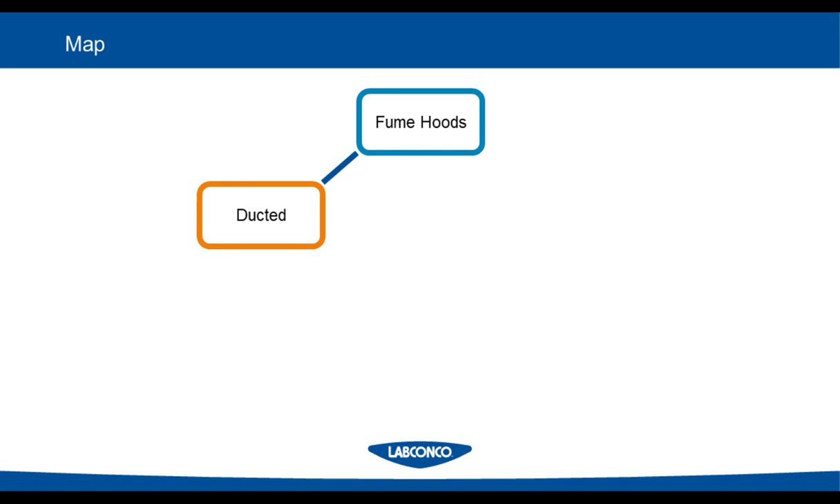Now, ducted fume hoods can come in one of two configurations: the remote blower or the built-in blower models. The first configuration we're going to talk about is the remote blower configuration. This is the most common type of installation. This puts the blower on the roof or somewhere outside of the building, away from the fume hood in a remote location, hence the name of the configuration.

This also allows it to be a little bit quieter than typical because, as I've said, it's far away from the hood. Another aspect to the remote blower is that it can be sized for duct length. This includes the total length of the duct, the 90-degree bends, or any other differences in your mechanical system. The benefit here is that no matter what you have, this can be properly sized for a blower that's going to work for your individual fume hood setup.

They are also very safe. Remote blower puts the entire duct run under negative pressure, and that means that if there are any leaks or seams in the duct run, all the air on the outside of the duct is just going to be sucked into the duct and then exhausted through the building. So you're not at risk of any contaminants getting into a lab space with a remote blower having a duct system under negative pressure.

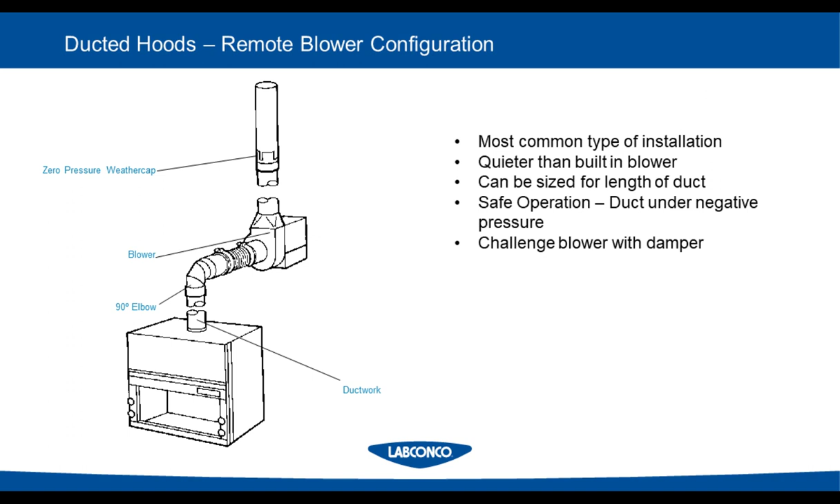This is a typical setup of a remote blower. You can see the zero pressure weather cap that's on the top. That does two things. It allows you to reach important height requirements of discharge for building codes, as well as prevents moisture or precipitation from getting into the blower and causing problems in that sense. So that's just what they typically look like. I wanted to make sure I showed that picture because it's pretty beneficial to see this setup.

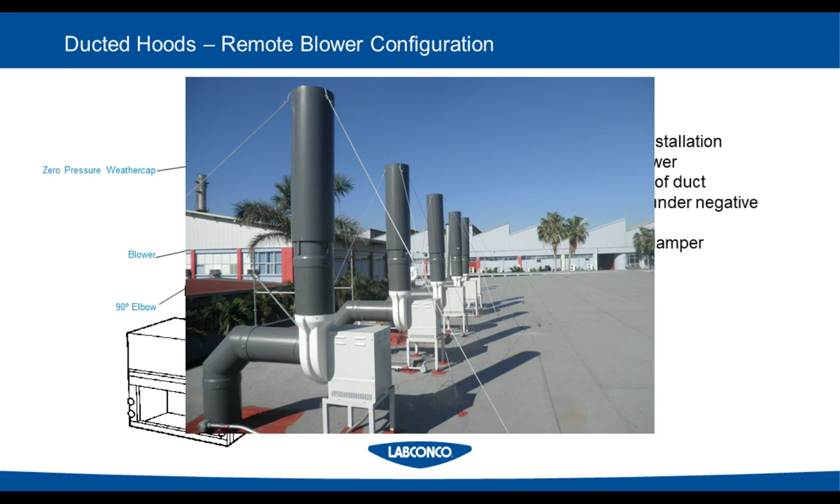So next we're going to talk about the built-in blower configuration. These are for simple, economical situations, and they're ideal for short, straight duct runs in low toxicity applications.

This is because it puts the blower right on top of the fume hood instead of on top of the building, where there's a lot of bends and connections that need to be made between the two. They are generally noisier than remote blower installations. As I've said, this is a situation where it puts the blower right at the outlet of the fume hood instead of really far away with a remote blower. That means you hear the blower a lot better in this type of situation.

The major downfall of a built-in blower configuration is the ductwork is under positive pressure. So in contrast to the remote blower situation, if there's a leak or a seam or a crack in the ductwork, the hazardous material that is being dealt with in the fume hood is actually going to be pushed out of those seams and into the lab space. So that's why this is for very simple situations and setups, because it's not the safest situation. And straight duct runs are a great way to eliminate that type of risk.

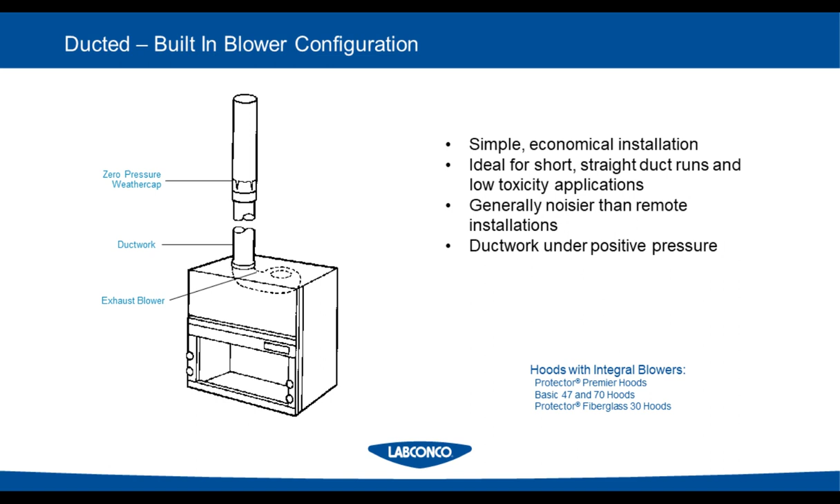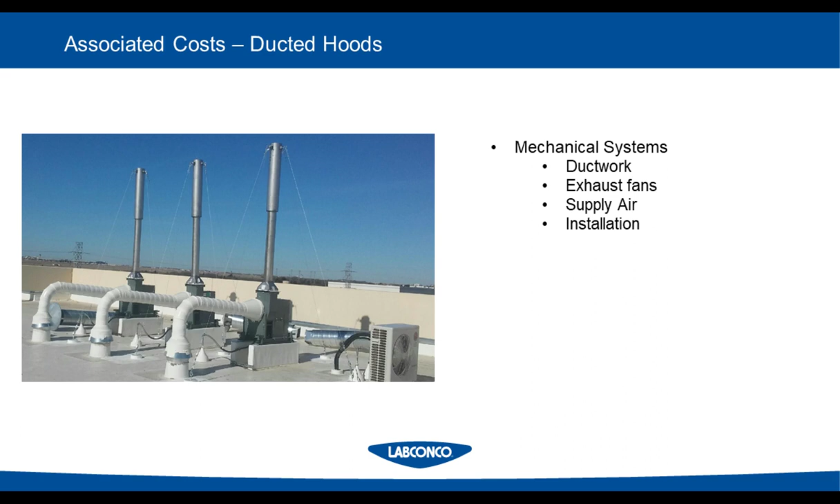So here are the associated costs with ducted fume hoods, and it mainly comes in the form of the mechanical systems. This includes the ductwork itself, the exhaust fans, the supply air, because if you are exhausting air, you need to make sure that you are supplying enough air so that the blower is able to do its job and is not starved of air, as well as the installation. So there is a lot that goes into ducted fume hoods that really needs to be thought of on the front end of the design phase, and can cause some additional costs in the build.

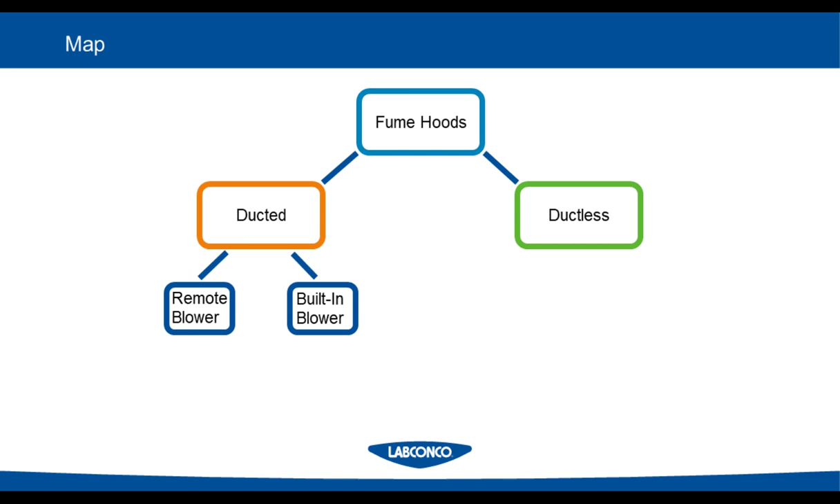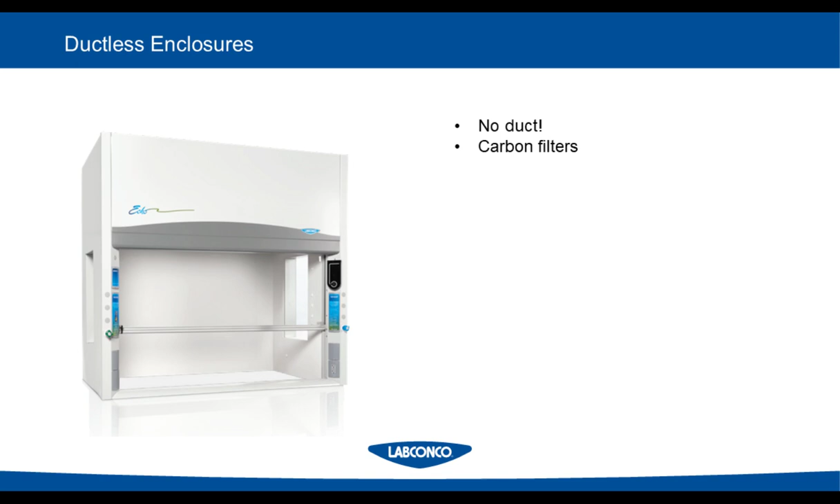So that was ducted fume hoods, and the other form of fume hoods that we're going to talk about are the ductless fume hoods, and these come in three types: the DH1, the DH2, and the DH3 setups. So ductless enclosures, as they sound, have no duct, which is a great benefit. And how they are able to do this is through carbon filtration. These filters capture the chemicals that are being brought through them and are able to recirculate clean air into the lab space. Most of the time, your application will need to be reviewed by the manufacturer to make sure that it is applicable to what you're doing in the lab, because not every application is suited for this. It's not a substitute for every hood.

There are a lot of benefits that come with a ductless fume hood, and one of them is energy efficiency. As I've stated before, ducted fume hoods take air that has been tempered to the comfort level of the lab and exhaust it out of the lab space. Then untempered air has to be brought into the lab space. All of this takes money, to make sure that the air, the temperature, the humidity, all of it remains constant. With these ductless hoods, no air is exhausted. So the benefit is that it doesn't present as big of a burden on an HVAC system.

The next benefit is that they are environmentally friendly. Ducted hoods will take these chemicals and hazardous vapors and fumes and exhaust them into the atmosphere. With the ductless enclosure, you're capturing those, and then you're taking these filters that have been loaded with these hazardous materials and disposing of them in an environmentally friendly way.

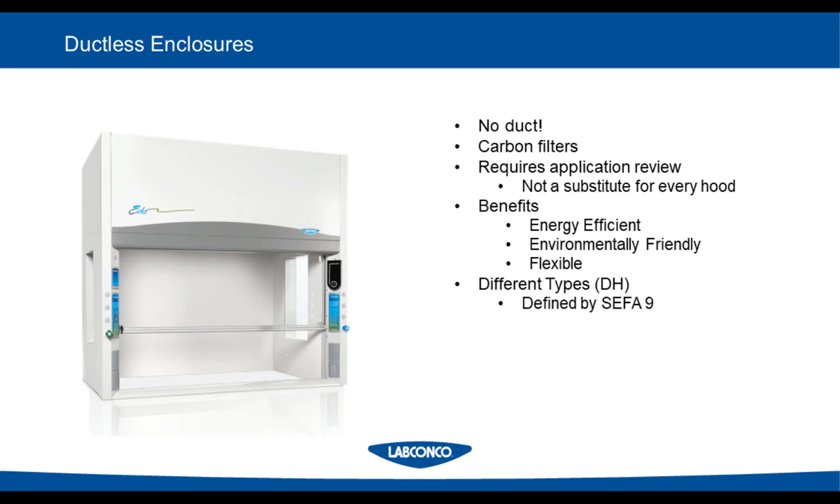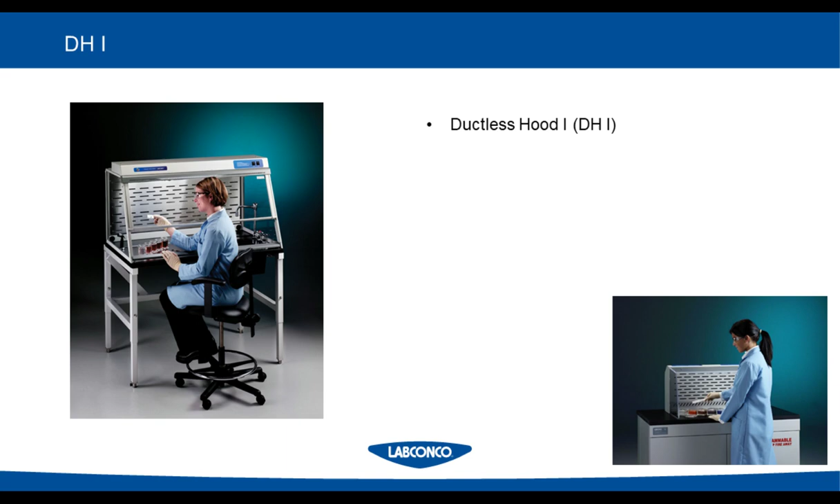As I've mentioned before, there are different types of ductless hoods, and that's in their DH. This is defined by SEFA 9. And we're going to talk about the different DHs, the DH1, the DH2, and the DH3 next. First, we're going to start with the DH1. The DH1 has a carbon filter, but it's mainly for non-toxic or nuisance odors.

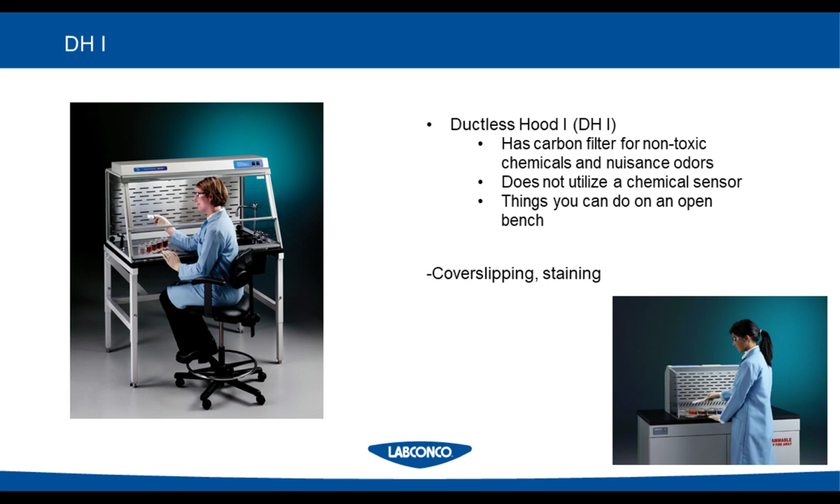These also do not have a chemical sensor. So pretty much with a DH1, a ductless hood 1, anything that you could do on an open bench, you can do in this hood. Things like cover slipping or staining. So it's a very simple application that these are designed for.

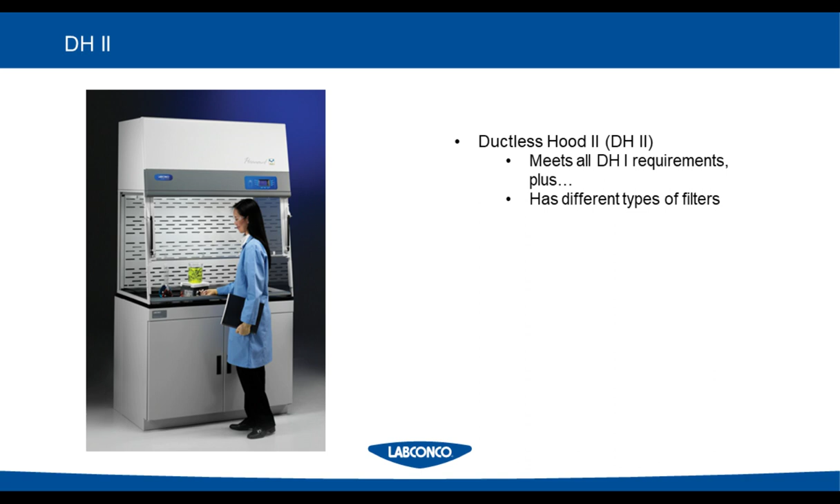Next, we have the DH2 hood, or ductless hood 2. This hood meets all of the DH1 requirements, plus it has different types of filters, like inorganic filters or ammonia filters or different kinds of filters that you can order based on what your application requires. They can also handle manufacturer-approved toxic chemicals, often determined through a chemical assessment form.

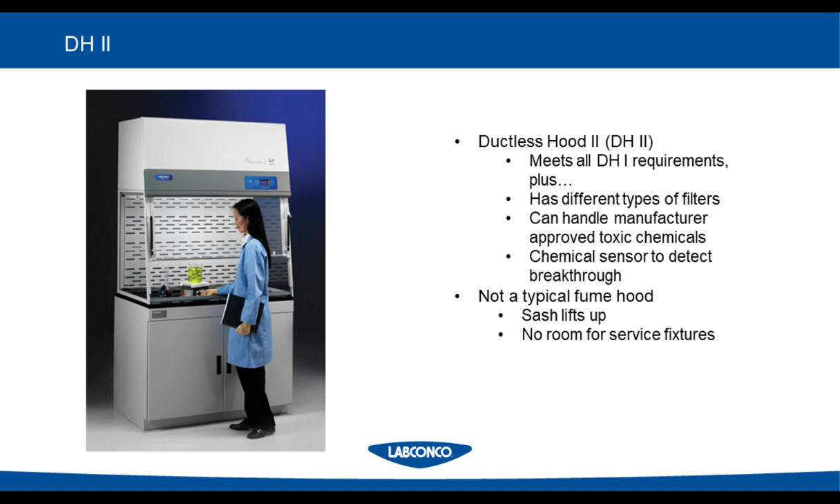Another thing about the DH2 is that they do have a chemical sensor to detect breakthrough, unlike the DH1. These are not typical fume hoods, though, as you can kind of see. The sash here, the opening, just lifts up instead of rising vertically and seamlessly. There's also no room for service fixtures, such as air, gas, electrical, or anything that you might need for the fume hood.

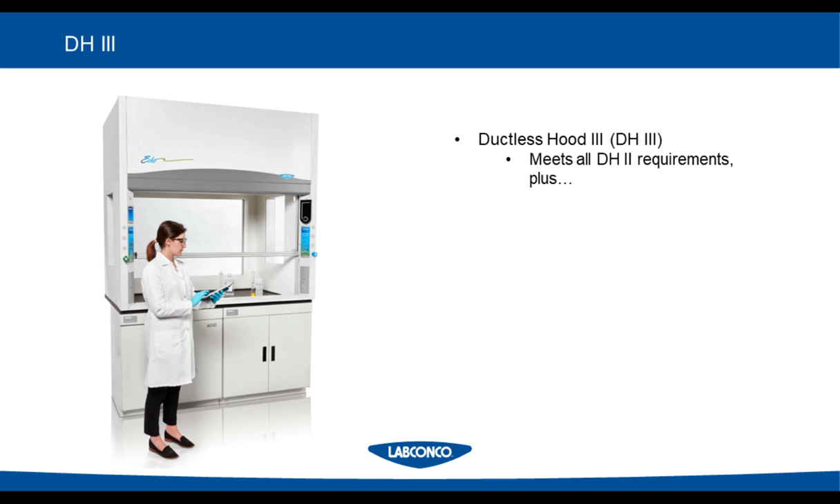Finally, we will talk about the DH3, or the ductless hood 3. Now, this hood meets all of the DH2 requirements, plus, and this is a big one, it has a secondary backup filter. And in particular, the secondary filter is identical to the primary filter.

Where the DH2 lacks in safety is that if you are using the hood and the chemical breakthrough sensor goes off, well, you don't have a whole lot of time to clear out everything that's in the hood. Once that chemical sensor is going off, there's a potential that that chemical or that vapor is escaping into the lab space. With the DH3, it has a secondary filter. So even if that alarm goes off, you still have your secondary backup filter that will protect you for as long as it takes to decontaminate the hood or just get everything out, and then ultimately replace the filters.

These filters are of one kind, and they're built to handle acids, solvents, and bases. So again, the difference here between the DH3 and the DH2 is that the DH3 just offers a new dimension of versatility in that you don't need to buy multiple types of filters. You're good with the one, which is a big benefit.

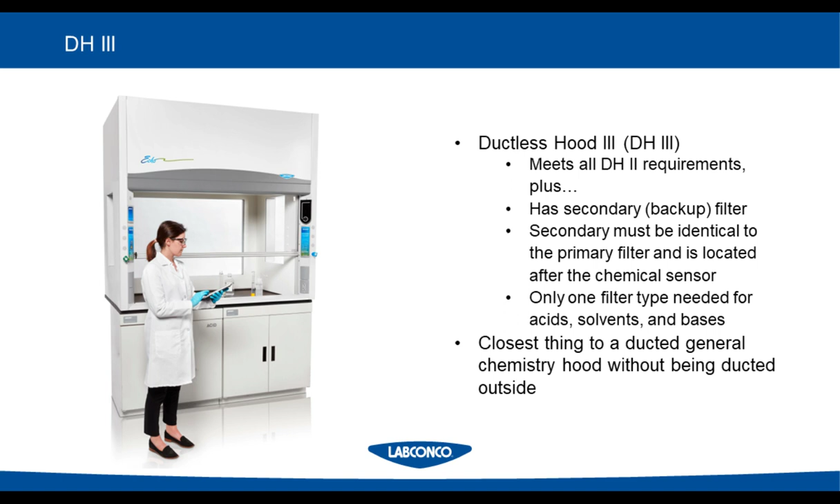These hoods are also the closest thing to a ducted general chemistry hood, without being ducted to outside, of course. As you can see in the picture, it is a full-size hood. The sash raises vertically instead of hinges, and there's also slots on the corner posts that allow for the installation of service fixtures such as the air, gas, and electrical.

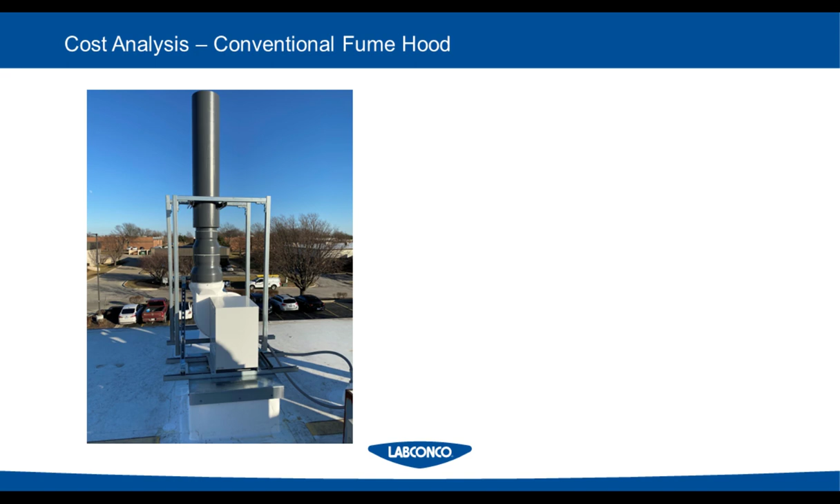So now I wanted to go over a cost analysis of different types of fume hood configurations that will allow you to decide what is best for your lab. The first one I want to talk about is a conventional fume hood or a constant air volume situation. This is a scenario where the quantity of the exhaust air never changes, hence the name constant air volume. No matter where the sash is or the components inside the hood, you're always exhausting the same amount of air.

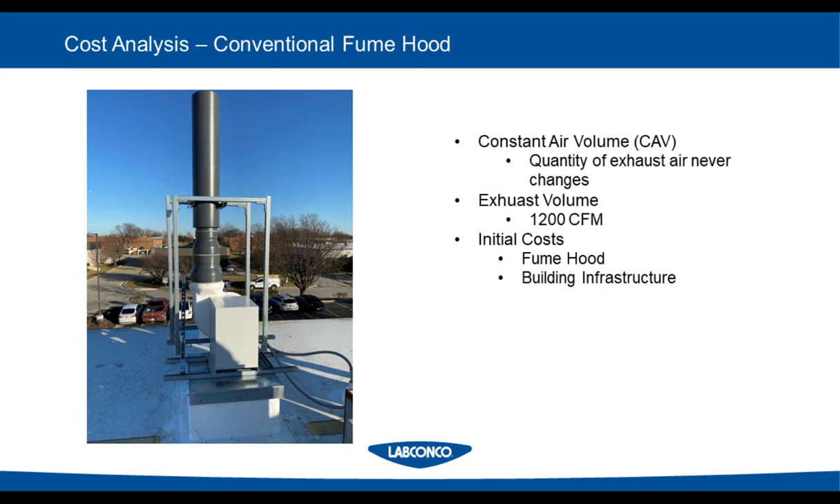And for this analysis, we're going to use a specific exhaust volume of about 1,200 CFM. This is pretty typical for a conventional 6-foot benchtop fume hood. The initial costs on this would include the fume hood itself, as well as the building infrastructure, the mechanical, electrical, and plumbing. And we're going to take a look at this in a table format.

You can see here the benchtop hood itself is about $14,500. The building infrastructure adds on another $20,000, which means the total capital equipment cost is about $34,500. Out of all of the systems that we're going to look at, this is actually the lowest initial cost of the three. But you'll notice where it has a low initial cost, it makes up for in the operating and maintenance costs.

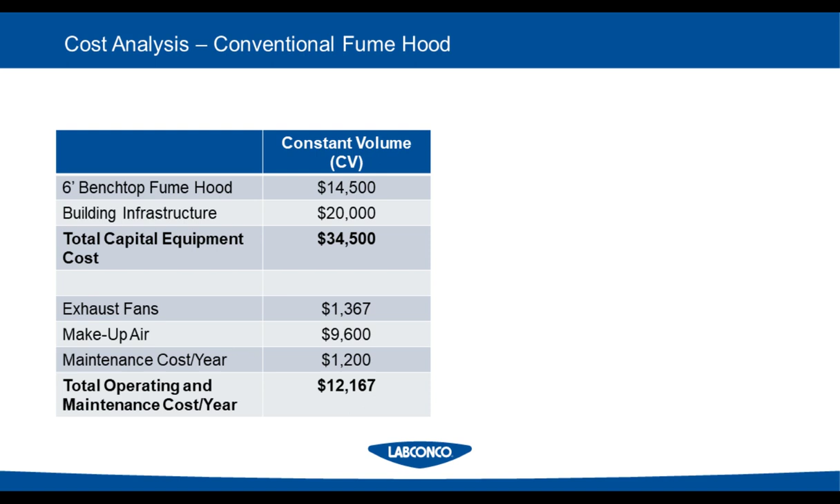Specifically, the makeup air column of having $9,600. It's a pretty large number and equates to about $12,167 a year of operating and maintenance costs for that one hood. It's a pretty significant cost, especially when you see what the next couple of hoods will bring.

The next analysis that we're going to do is on a variable air volume fume hood. As the name suggests, the VAV means that the quantity of the exhaust air actually changes to maintain a specific face velocity. So in the CAV, what remains constant is the air exhausted, and at VAV, what remains constant is the face velocity. And in this situation, a typical 6-foot benchtop fume hood will be able to operate on about 800 CFM average.

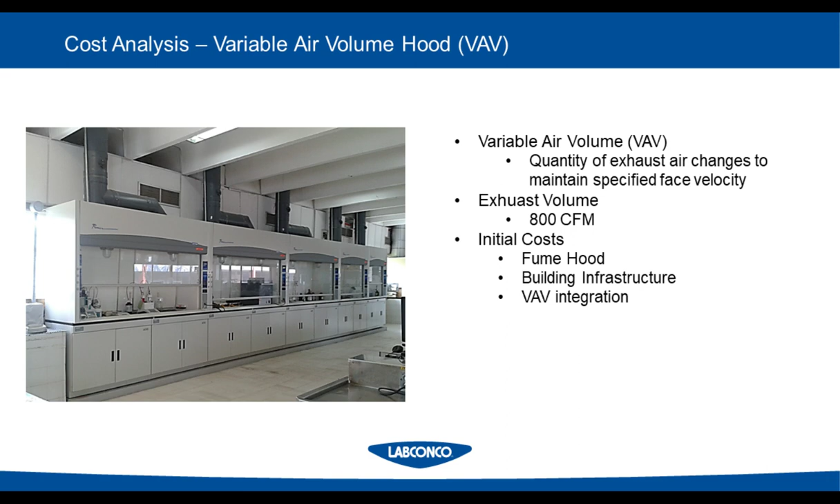The initial cost for this type of fume hood includes the fume hood itself, very similar to the CAV, as well as the building infrastructure. And finally, it requires VAV integration with a whole other system. This does add a little bit more of initial cost, as you'll see in this table. We can see a comparison here between the constant volume and the variable air volume fume hood, in that it does have a larger initial cost at the $39,500, about $5,000 more. Where it makes up for that is going to be in the operating and maintenance cost.

And again, drawing attention to the makeup air portion of this table, it only requires about $6,400. And this number comes from taking a typical cost for fume hoods of about $8 per CFM per year. And that's where we're getting these makeup air numbers. And the VAV overall has an operating and maintenance cost per year of $8,811. So there are significant yearly cost savings by going to a variable air volume system.

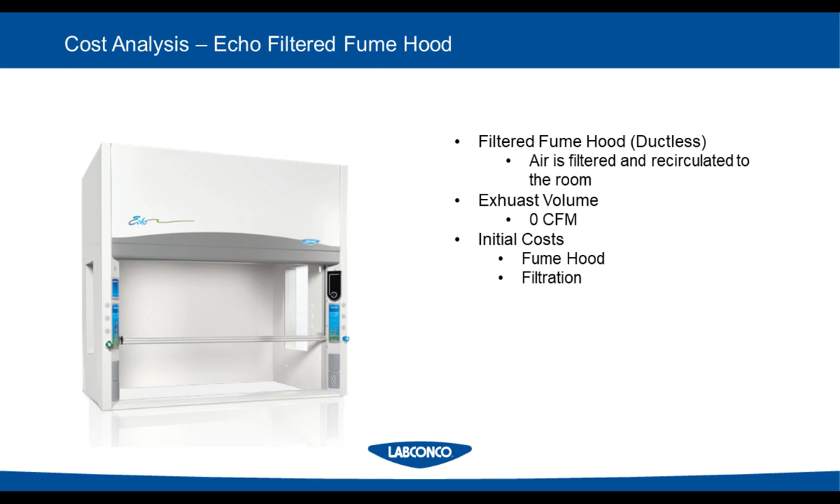And last, we're going to look at the Echo filtered fume hood. This is a ductless fume hood that we've sort of discussed. And in these hoods, air is filtered and then it's recirculated into the room. This means that the exhaust volume is 0 CFM, much less. The initial costs are very similar in that you do need the fume hood, but where these hoods differ is that you need to order the filters that go with the fume hood. They are a separate cost.

I wanted to look at a final cost analysis with all three of these put in one slide. You can see that the total capital equipment cost for the Echo filtered fume hood is actually less than that of the variable air volume fume hood at approximately $38,520. Where this hood really excels is in that makeup air portion. It has $0 per year since you are recirculating air, and that $8 per CFM does not apply here.

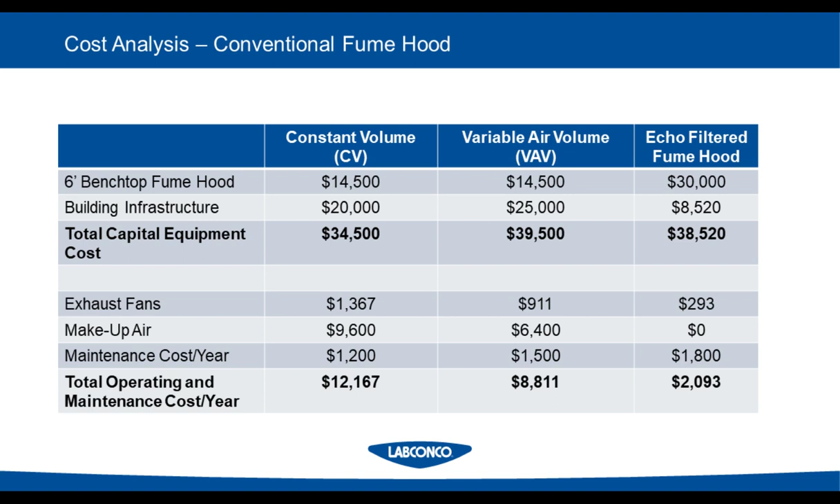It does have a little bit higher maintenance costs per year because you do have the filters associated with the fume hood, but that $2,093 of total operating and maintenance costs per year more than makes up for that. So those are the types of fume hoods and ways that you can explore to increase your lab's efficiency. But I wanted to pass this on to Ken Crooks with Erlab to explain how these filtered fume hoods are able to do what they do and perform the way that they are.

All right. Thank you very much, Kasey. Good job. Appreciate that. And thank you all to our viewers for your time today. Appreciate that too.

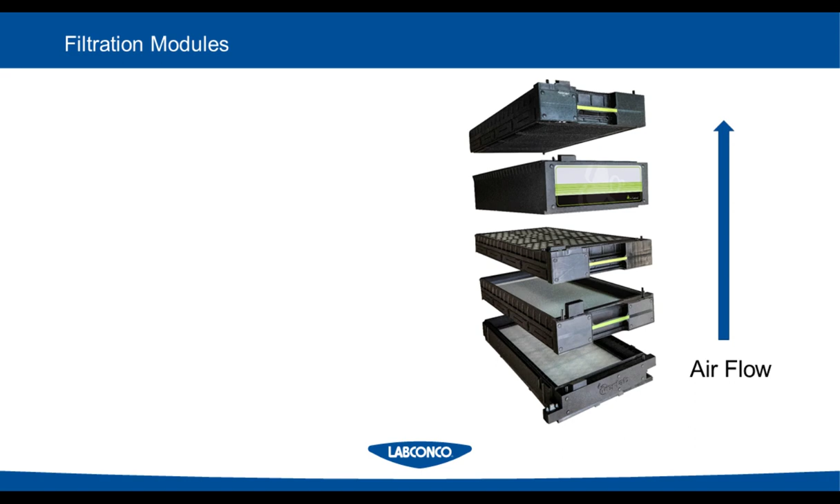So we look at the filtration and we want to know, how does it work? Obviously, it's very important. It's pretty simple how a ducted fume hood works, but how does a ductless hood, especially a DH3, the best of the best here? So I just want to work logically. This is a module or stack of filtration technology sitting on top of the filtered fume hood. And starting at the bottom, you first off have a light. The hood users need to see what they're doing, of course. And then above that light will be some pre-filters. There are optional different pre-filters. We'll talk about that in a couple slides.

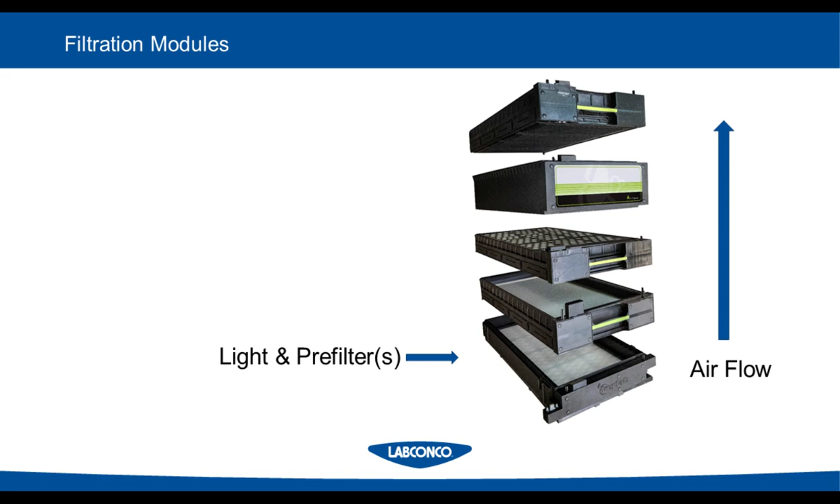And then on top of that base module would be a HEPA filter if you're working with hazardous powders. This is not required, this is optional. And if you're not working with any hazardous particulates or solids that may become particulates or high temperature acid use, then you would not need the HEPA filter. And I'll talk about how we determine when and where. On top of that would be the first carbon filter. So this is the one I like to describe as doing all the heavy lifting. This is doing the chemical adsorption day in and day out, capturing everything generated within that hood and stopping it at that point. Coming off the outlet side of this filter will be very clean air.

And I'll talk about just how clean in a minute, amazingly clean. On top of that now would be the fan box. And so just like Kasey was describing with the remote blower configuration or the manifolded VAV system that has the fan up on the roof also, this fan is drawing air in through the open sash, up through the cavity of the fume hood, capturing whatever is being evaporated and vapors and whatnot used inside that hood, and then drawing it up through the filtration column. So again, any leakage would be clean air into dirty, not contaminated air blowing out. I mean, this is a very important point, and of course we comply with that also.

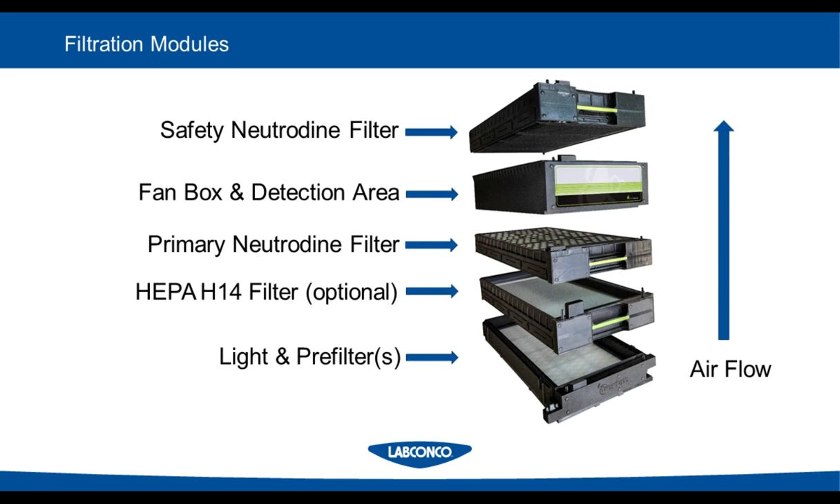And then lastly, sitting on the very top of this is that safety filter. So after the fan and the detection area, that's also where the sensors are located, we place a fully redundant safety filter on top. So once we detect molecular breakthrough of the primary filter, and we sound that alarm down to the user, we also have that secondary safety filter sitting on top to capture whatever molecules did break through and still return clean air back into that laboratory. Very important differentiation with the DH3 technology.

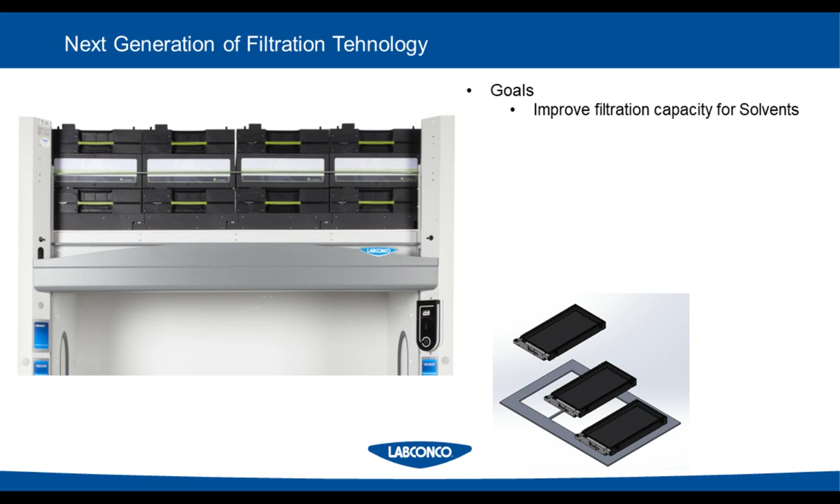So how does it all look? This is a 6-foot wide fume hood. You can see, if you count, there's 4 modules of filtration stacked up in there. And so this is our latest generation of technology, and we're very excited to release this with Labconco. And our goals were to improve the filtration capacity for solvents. Solvents, and I have a slide coming up on that, solvents are the most challenging chemical you can use. They're also the most common, but we've got that figured out, not to worry.

Secondly, ease of integration and installation. And so this lower image here where the 3 base modules are in descending order there, they basically are, I have kids, you'll realize when I say this, they're like Legos. They interlock and they stack and they distribute power and communications both horizontally and vertically and self-configure. So that was a huge step in the right direction for ease of integration and installation for our dealers and making sure that you, the customer, are handed over a fully working filtered fume hood.

Next up, we wanted to improve the detection by adding more sensors. So there's now an optional formaldehyde sensor, especially with the new safety limits on formaldehyde exposure. It was very important to get a specific sensor for that for the applications that are using formaldehyde. You don't need it if you're not. Also a relative humidity sensor in each fan module. And the temperature sensor was already there, but we've now moved it up into each fan module also.

And then lastly, adding an anemometer. So we'll measure directly the face velocity, and so that's the speed at which that air is moving into the fume hood. It's a very good indicator of safety, though containment testing is the final indicator of that. We wanted to expand the communications so you can still hardwire to your building network. My kids, back to them again, my kids look at me cross-eyed when I say hardwired. No, come on now. So we have Wi-Fi and Bluetooth capabilities also, so much easier connectivity there.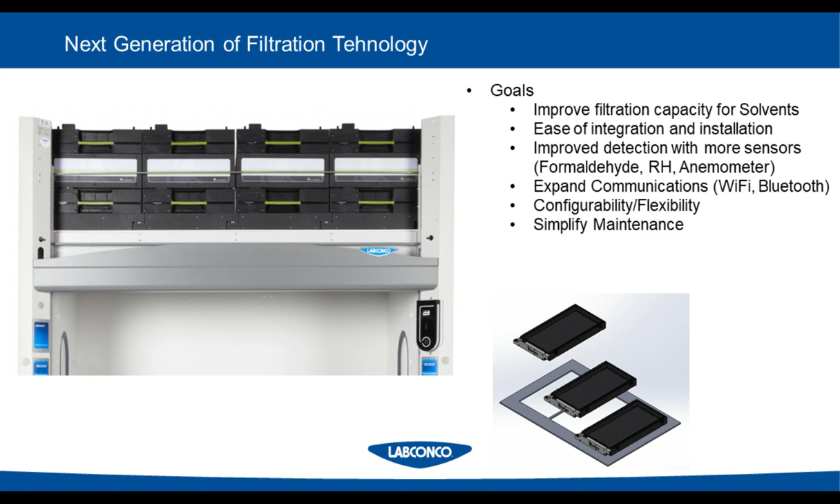And then the configuration and flexibility. There are different pre-filters you can use along with different sensors you can use depending on your specific application. But as Kasey had also mentioned earlier, there's that one filter type that handles acids, bases, and solvents simultaneously in much higher volumes than in the past. And simplified the maintenance also, of course. With these improvements now, it's much easier to maintain these hoods. It was pretty easy before, but it's a lot easier even now.

So I mentioned solvents, that first goal. We don't have to go through all these details. I don't want to bore you with these, but again, solvents, because of their volatile nature, have always been the largest challenge with chemical molecular filtration, activated carbon type filters. And so we've done a few patented things here that have really expanded our capacity. The example graph here is ethanol. We've increased by over 600% the time before some level of emission is sensed after the filter. And the first column on the graph on the left, middle column, the 1% of TLV, threshold limit value.

So that is a value of exposure that's allowed by the American Conference of Governmental Industrial Hygienists. And TLV is not a short-term exposure, it is a lifetime exposure. So 8 hours a day, 5 days a work week, 40 years of your life. We're guaranteeing to you detection and alarming at no greater than 1% of that already very low limit.

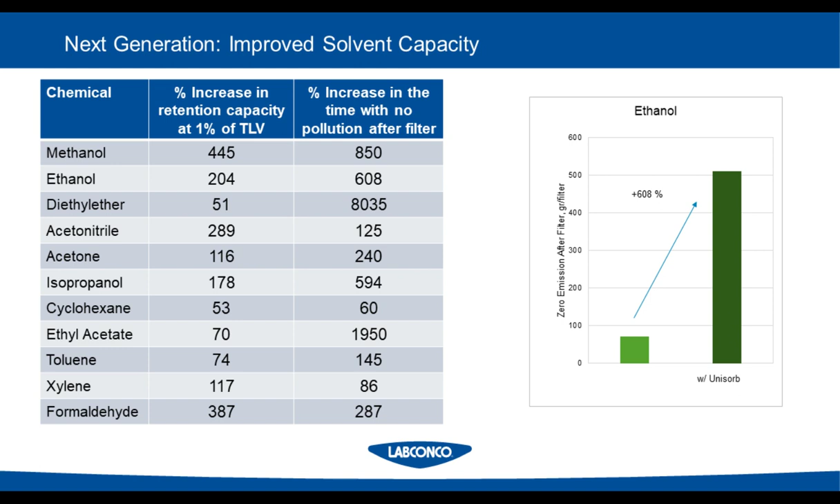And so how that plays in here to our capacity, these are capacity increases before we sense greater than 1% on the outlet side of the primary filter. So just a real dramatic increase. Is there still room for improvement? Heck yeah. If you're going to use diethyl ether or cyclohexane, those are challenging, and we'll want to use those with really a focus on limiting evaporation. So very, very small amounts, and keep it capped and covered when you're not using it because it's got a low boiling point and it wants to evolve very quickly. I think you know that if you use them.

So sensors and detection, how is it we go about that 1% TLV exposure that I just talked about? So first off, there's an acid sensor in there, a whole suite of sensors, and a solvent sensor that are both located up in the fan modules. So when that primary filter is no longer at the efficiency that we all want it to be at, we will detect that and we will alarm. Meanwhile, coming back into that laboratory is clean air, no greater than 1% of what you're allowed to be exposed to. So it could be 99% and you'd still be safe. Our guarantee to you is less than 1% of that, just to be extra safe.

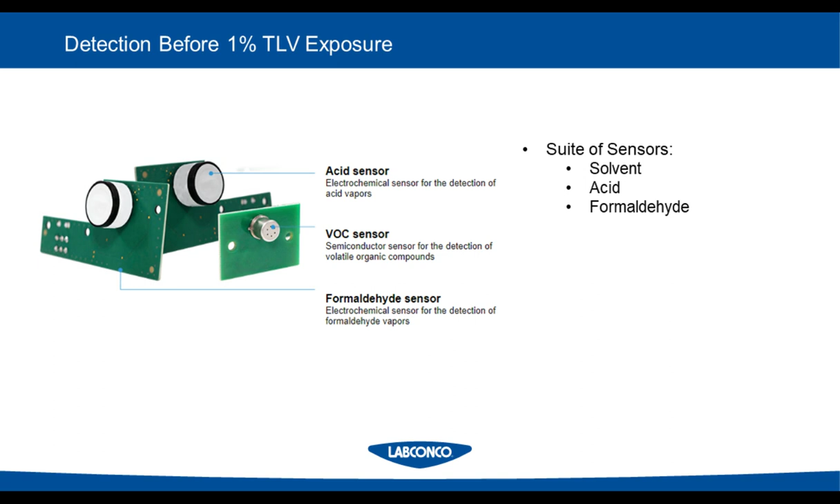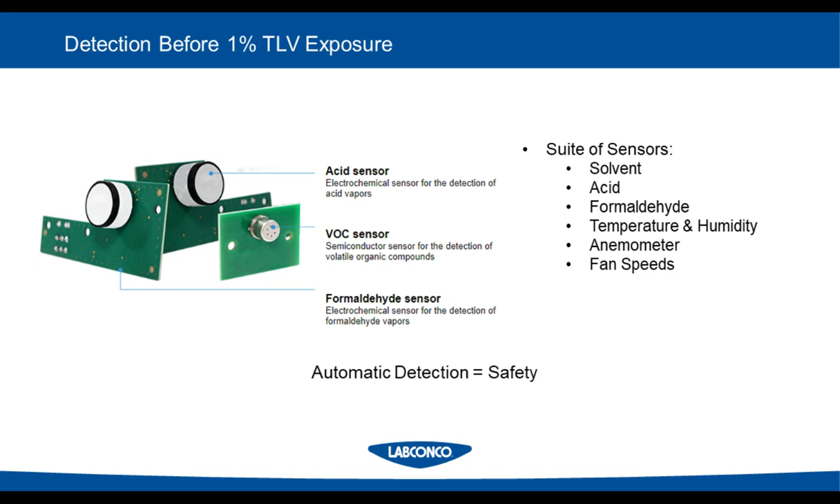Additionally, we have that optional formaldehyde sensor. We expect that to be in about 15% of the applications. Not too commonly used, but when it is, it is. And then that temperature and humidity sensor also. And lastly, that anemometer sensor. All of these add up to safety. If we're sensing it, we're detecting it, that's going to bring to you safety as a hood user.

But we need to know how you're going to use these hoods. As Kasey talked, I think, very early on, this isn't for everybody. Ductless hoods need to be approved each and every time for your specific application. So any reputable manufacturer will come to you with a chemical questionnaire, and this is a lot more than just a chemical list. A chemical list is a good sort of go, no-go gauge place to start, but we need to better understand not only which chemicals you're using, but how you're using them. What is the type of handling? In this case, we have a couple of recrystallizations, some evaporation, thin layer chromatography, so forth and so on.

Then you tell us the chemical, you tell us what type of container it's going to be housed in. That lets us know how much evaporation may happen when it's open. You tell us, is it primarily open or closed? What's the dilution or concentration? The temperature, vitally important to know the temperature you're handling that chemical at. How often do you do that handling? On average per month across a year. And then each time that you handle it, how many milliliters or grams, depending if it's a liquid or solid, and then for how long.

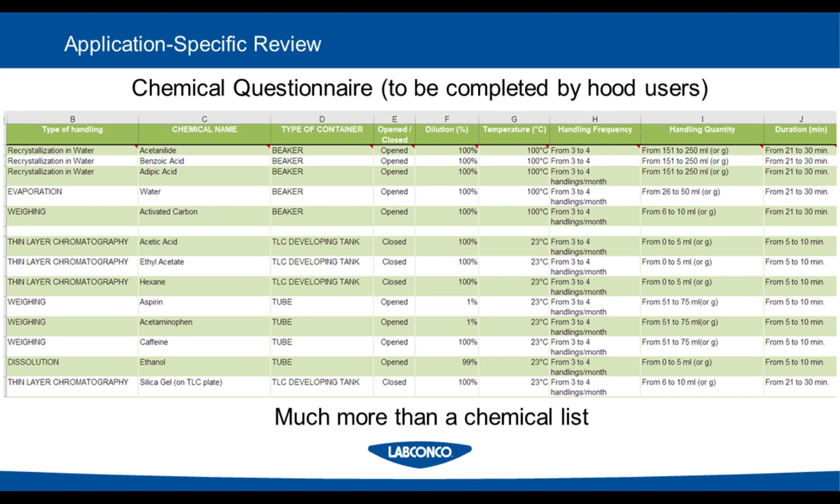And so armed with this level of information and detail, which is a little bit of work for your hood users to complete, but once it's done, it's done. We can go through there and be absolutely sure that your application is either approved or denied. And we typically deny about 25 to 30% of the applications each year. And if we don't approve it, we won't let it be sold. It's really just that simple. Safety first.

And in that report and that approval, we'll go through everything provided by the hood users, and from a safety perspective, at the very top of this slide, we'll look at containment. Is everything you declared to be used in this hood going to be contained by the hood? Now, this doesn't matter if it's ducted or ductless. In this case, we're just looking at what is it you're using.

And an important part of this also is just making sure that everybody knows, to be crystal clear, this is a chemical fume hood. This is not a biosafety cabinet. Sometimes we say filtered, people start to think of BSC, a biosafety cabinet, which is also HEPA filtered for biologicals. Biologicals are not approved for use in these hoods.

So we'll double check that on the chemical list. Detection: if everything declared is going to break through those filters, will we be able to detect it? Will the filter then be compatible with everything on that list? Will we capture and contain everything on that list? And then lastly, life expectancy, which approval of that is really more up to the end users.

So on that point, in the middle here under the filtration section, is filter life. Now a little internal speak, sorry for this, the M1 through M6, that's the hood size, going from a 3-footer up to an 8-footer. So for an example, an M4, 4 modules of filtration, that is a 6-foot wide hood, very common application in undergraduate chemistry teaching labs, for instance, our most prevalent application. And in that case, we're guaranteeing for this customer 48 months filter life, very typical for what we see, again, especially in teaching applications.

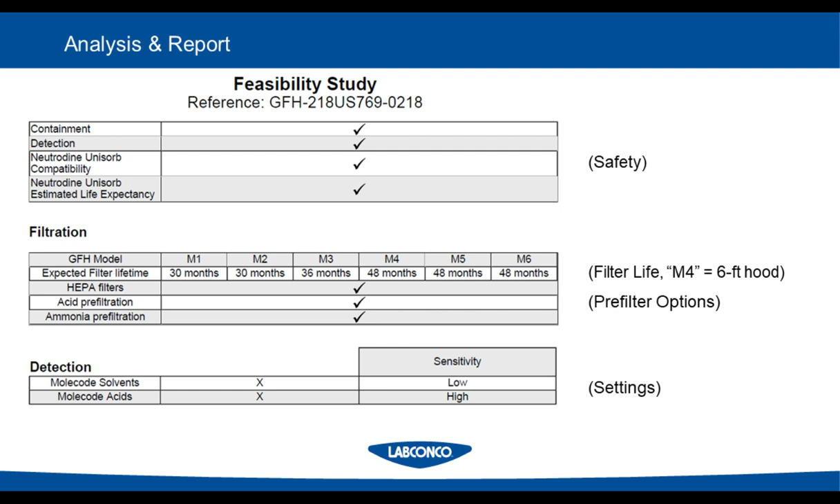And some of these aren't even hazardous, not in the concentration that would be released into the laboratory, but some of them most certainly are. So if you're using any of these, and you're using them in higher volumes, it's probably a no-go for a filtered fume hood. If you're using them in lower volumes, and I know higher and lower, that's always a difficult subject. What is high, what is low, what is a lot, what is a little, what is medium? Really depends on the frequency and the quantity used. I like to think if it's less than 200 milliliters a couple times a month, I think we've got a solution for you.

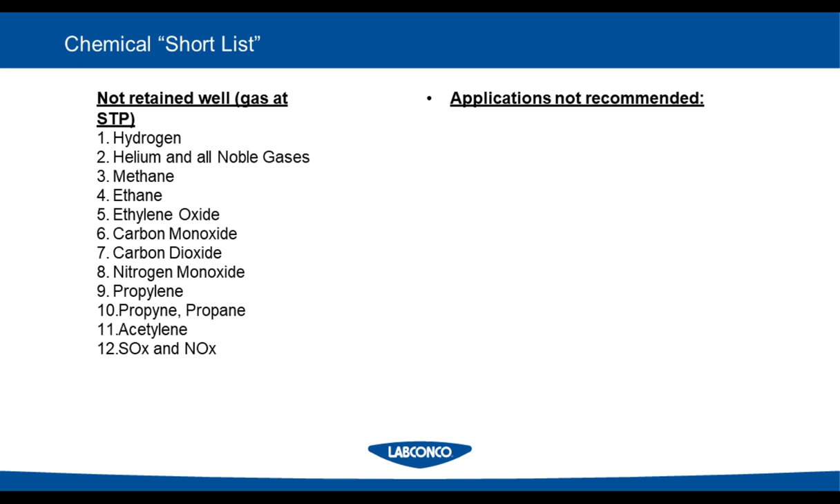Now, it's not just the chemicals, it's also which applications are not recommended for a filtered fume hood. I mean, this is the no-go list, right? So if you're a perchloric acid hood, if you're a radioisotope hood or acid digestion type hood, definitely stick with your ducted hood. That's a special build, a special part anyhow. It is not a candidate for filtration. Highly exothermic reactions.

One thing to remember about filtered ductless hoods is they do not remove heat from the laboratory. So unlike a ducted hood, which would exhaust that heat right outside, filtered hoods would not. They would return that heat right to the lab itself. Again, really not a problem for your teaching classes. You're usually working with smaller amounts. You can absolutely use Bunsen burners in these hoods and heat your samples and whatnot.

That's not a problem. It's just that if it's a really exothermic type reaction, especially if it generates a lot of smoke also with that, carbon filters do not capture smoke. The optional HEPA filters will capture most smoke particles. I think there would still be a slight smoke odor that would make it into the lab though. So these are, again, things to consider.

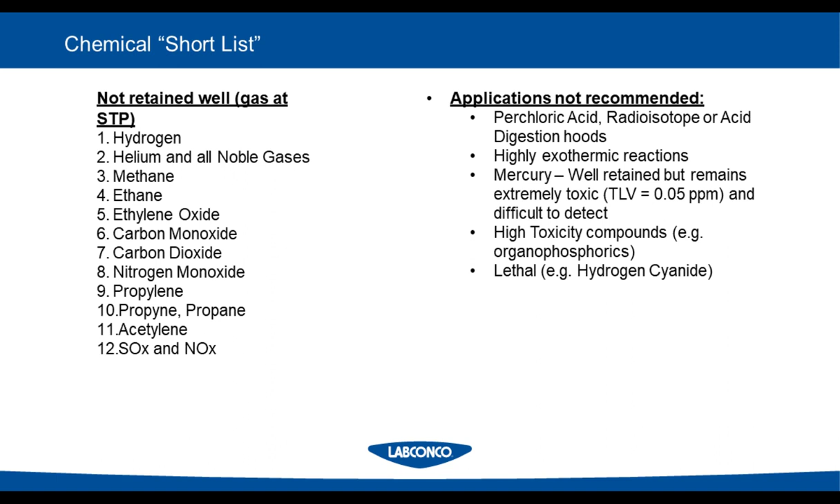On the no-go list: mercury, not commonly used anymore, thankfully. We can capture it really well. Problem is we can't detect it, not down at the TLV level required anyhow, so we put that on the no-go list. And then anything that's high toxicity or basically immediately lethal, those would not be used in a filtered fume hood.

All right, so then how do we know that? Again, getting down to the nitty-gritty here. So we have our test bubble here in the back of our laboratory in France, and we have our GCMS machine, and we have gone through hundreds of chemicals, the most commonly used chemicals in laboratories today, and those 700 plus chemicals represent thousands of chemicals that will respond in a very similar manner to activated carbon molecular adsorption.

And each one of those is tested at least 6 or more different concentrations, and then each one of those individual tests is performed a minimum of twice, just to make sure of repeatability. So we're absolutely confident in our capacity charts, and we know exactly how much we're going to capture before you're going to have greater than 1% TLV breakthrough on that filter.

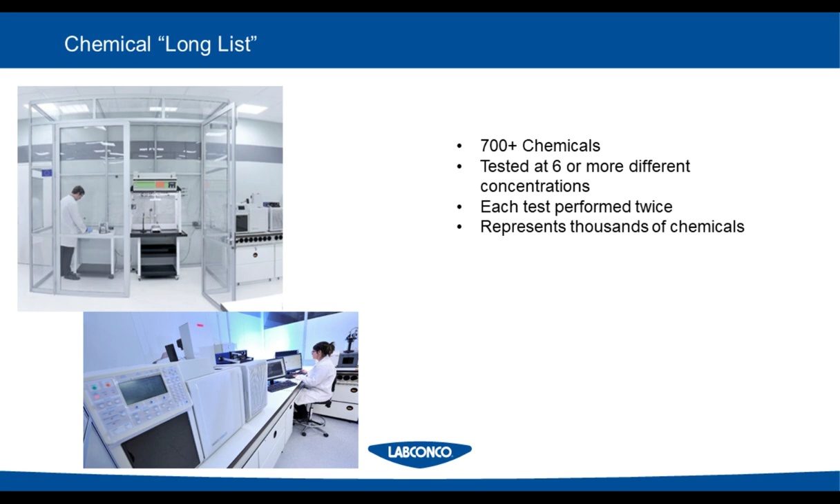And then again, they represent thousands of different chemicals, not every chemical, and so if you've got a chemical that's not on our long list, we absolutely can review that and even test that in this chamber in our laboratory. So that's the test bubble, that's the GCMS, which is no great deal, everybody knows that. It's just a very large investment for us in testing instruments, but very much required.

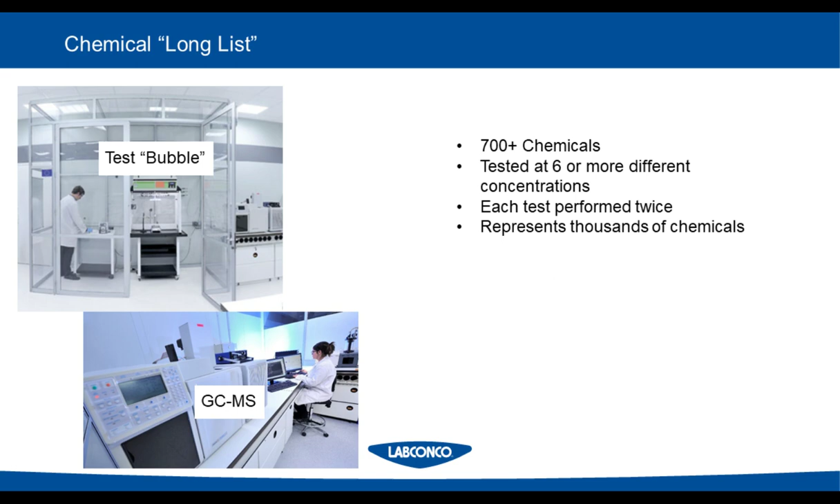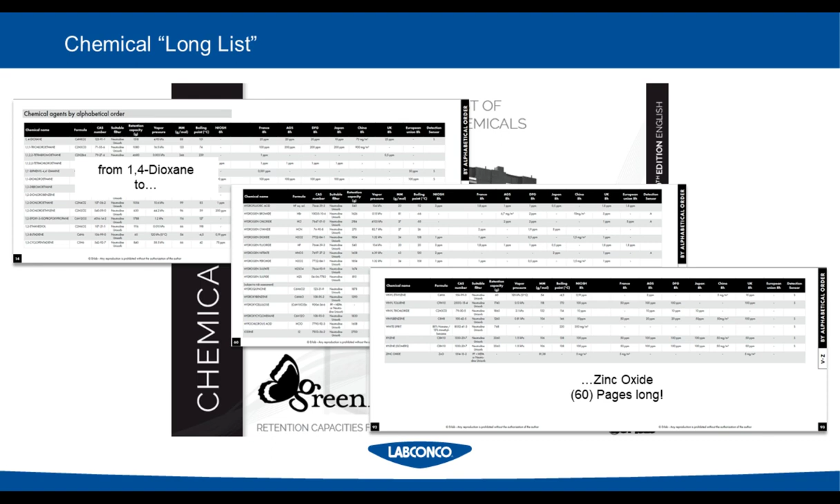And so with all that testing, for now decades of testing, we have published our latest edition of the long list. This is the chemical list that is now over 60 pages long of the chemicals that we know exactly how much we can adsorb, and from that we'll know how long the filter will last in your specific application.

Maintenance. Kasey talked about how, in his slide, about $1,800 per year is the average operating cost, and that is replacing the filters, maintaining the system, making sure it's working year after year. So it's not makeup air, that's the great thing, because that's much more expensive. And so when it comes time to replace the filter, it's a very easy system. We call it a revolving system.

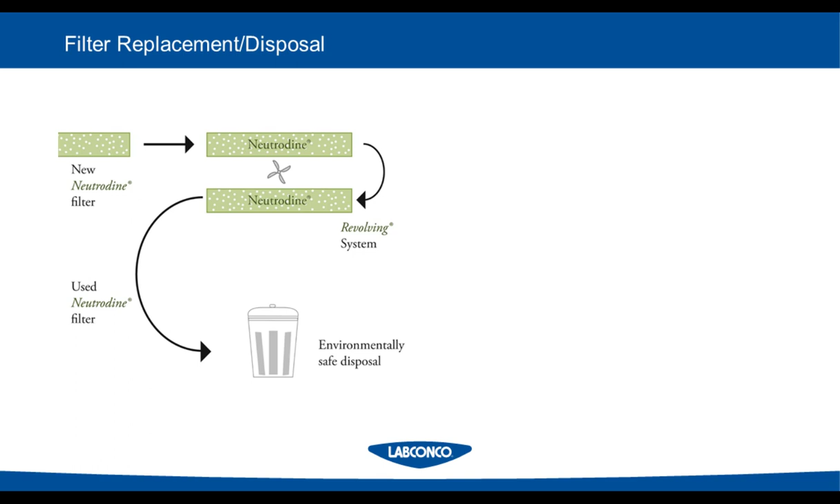I wish it were a crank handle and it would revolve on its own. It's not quite that simple. You do have to lift off the old filter and put the new one on, but not a big deal. It's 25 pounds at the top of a 6-foot ladder at arm's length, easy to do. And so the first thing you want to do, obviously, is wear your standard PPE, gloves, glasses, a lab coat too if required in your lab. You do not need to wear a respirator.

That is not required. Once the chemical is adsorbed by the carbon bed, it is staying in there. The molecules are not coming out. You could lift the filter off, accidentally drop it on the floor from the top of that 6-foot ladder, and we have it compartmentalized so it wouldn't break, but if you manage to break it open somehow, you'd have carbon granules on the floor. It'd be quite a mess to sweep up, no big deal. I've never done it in 7 years, but again, could be done.

What you wouldn't have, most importantly, is liquid chemicals, you wouldn't have escape of molecules. They're all in that carbon structure, held there, not to be released, not under normal atmospheric conditions anyhow.

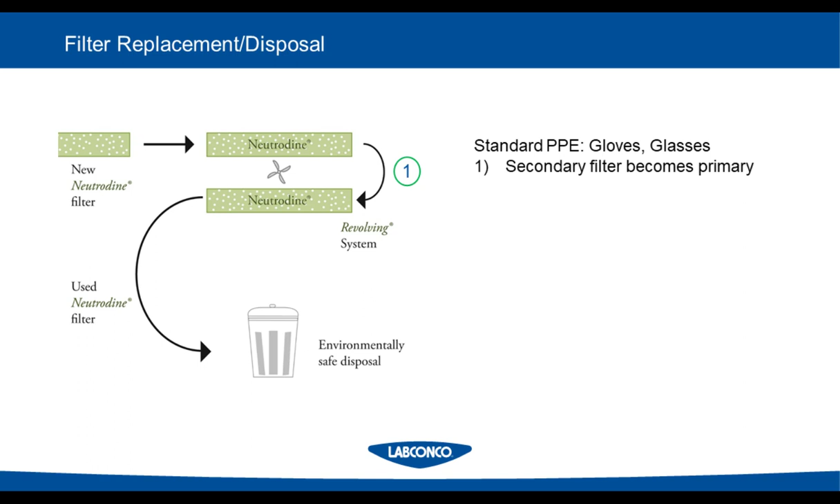So you would then take the secondary filter, the one that's on top, that safety filter, move it down to the primary position, so it can start doing all the heavy lifting, as I call it. Step 2, you would put a new secondary filter on top. And then step 3, you would package the old primary filter in the heavy poly bag and cardboard box that the new filter came in and send that off for environmental disposal.

And there's a couple things there. Easiest and simplest, most direct is out for high temp incineration as hazardous waste. The good news is carbon filters have a lot of embedded energy. Activated coconut shells is what we use as our medium, and the best on earth, 15,000 square feet of surface area per gram. All of that is adsorbed chemicals. Now you have a lot of embedded energy that the incinerator will put back up on the electric grid to the tune of around 78 kilowatts per filter. Tremendous energy back up on the grid from each one of these filters.

And what comes out of that, per EPA requirements, you must have a 99.99% efficient incinerator, is basically one molecule in 10,000 gets out into the atmosphere up the stack. There'll be some CO2, there'll be some water molecules, but 1 in 10,000 molecules of the chemical make it up versus 10,000 of every 10,000 on the ducted hood that you didn't use when you chose the filtered hood.

There is an option to do the TCLP testing to make sure nothing leaches from these filters, and then the filters can go out as standard household waste. That testing is expensive though, so you'd have to have a lot of filters at the same time, and that's worked for some of our customers. Just throwing that out there as an option.

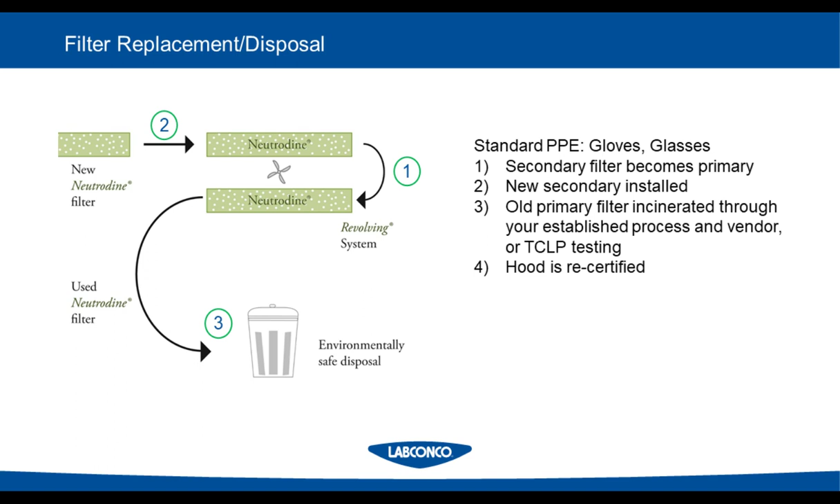So when it's safe to use for your application, which each application must be blessed ahead of time, there is a tremendous environmental and monetary benefit to using the filtered fume hood.

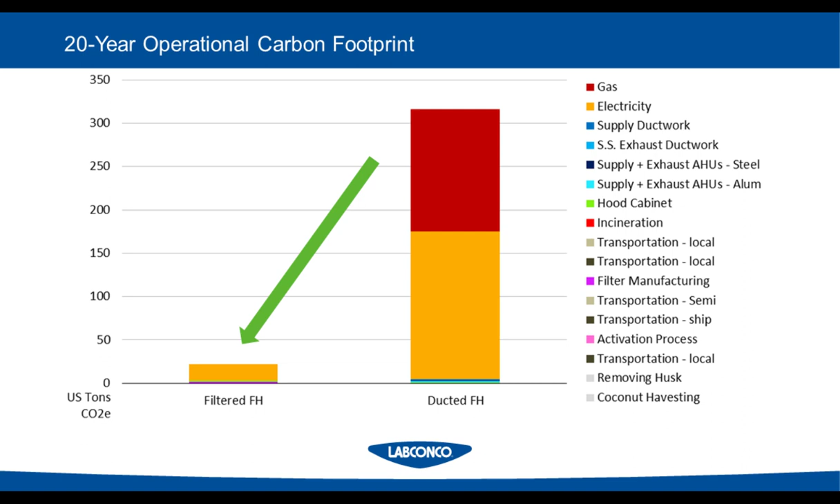All right, Kasey, I think it is back to you now. Thanks, Ken. Appreciate you providing that information.

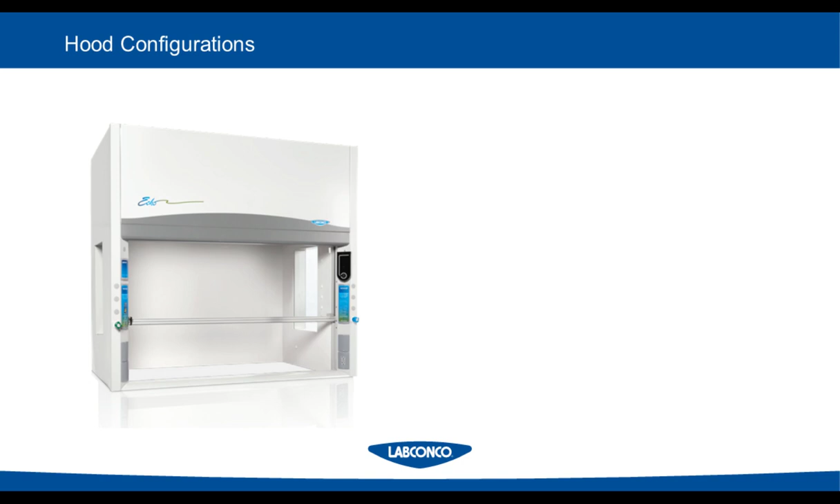So by now, you've learned what a ductless fume hood is. You've learned about the benefits that it can have on an HVAC system and improving the efficiency of your facility. And you've also learned about how it works and how it's safe. But now let's talk about what Labconco has to offer in these types of products.

First, we have our Echo, which is a full-size fume hood. As I have mentioned before, it comes in multiple widths. It comes in configurations that have no windows. It has side windows, which is what is shown here. And it also has side and back windows that allow for a 360-degree view of the hood interior, which is great for teaching applications.

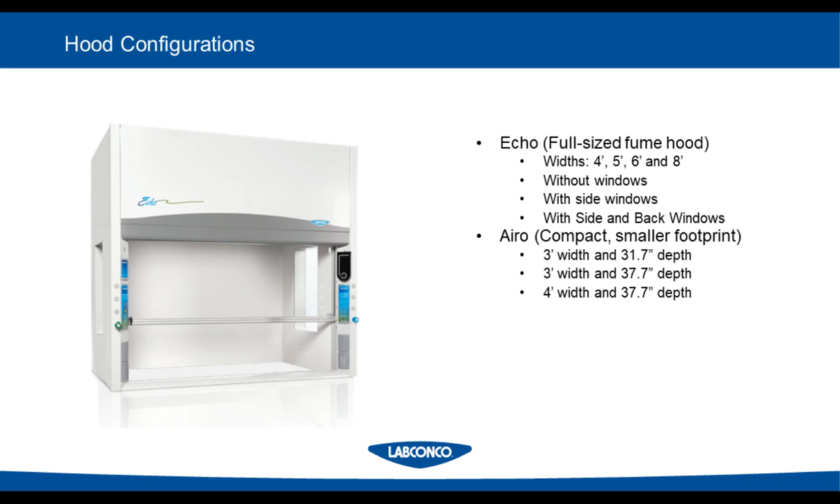We also have a smaller, more compact version of the Echo in our Airo. It has a shallower depth and also comes in smaller widths. It's also a little bit shorter, so it provides a good option for situations where maybe you have a smaller footprint in your lab space, or you have reduced height in your ceiling, but still need a ductless fume hood to operate your applications inside of.

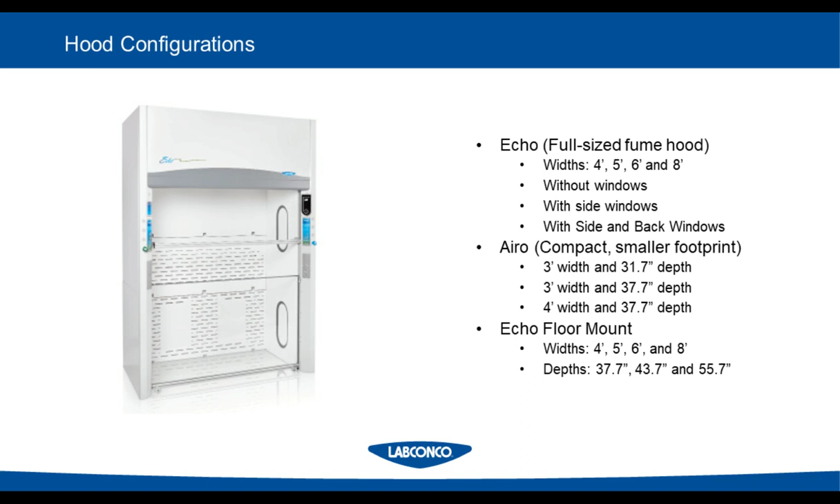There's also an Echo floor-mounted fume hood, which is very unique. It's a one-of-a-kind fume hood, and it is completely ductless, and it comes in multiple widths, the same widths as the Echo benchtop, but also comes in 2 additional depths because these hoods are made to house large pieces of equipment. So there are a lot of different sizes and shapes to meet your application needs. So that's what Labconco has to offer.

But I want to talk about the process of going about getting a ductless fume hood. The first step that needs to be done is an LPQ, or chemical assessment, needs to be filled out. As I have mentioned and as Ken has mentioned, this is a very important step because it determines the filtration compatibility and the requirements. There are certain things that we can add to the filtration column that can maybe handle a certain part of your application, and ultimately make sure that the longevity of these filters and the safety of the operator are ensured.

And next, you need to identify the appropriate hood. As I mentioned in the previous slide, Labconco has a variety of sizes of fume hoods. So in identifying this, you'll need to take into account the size of equipment that you may be using, or the available space that you have in your facility, and ensure that you are selecting the proper fume hood for your application.

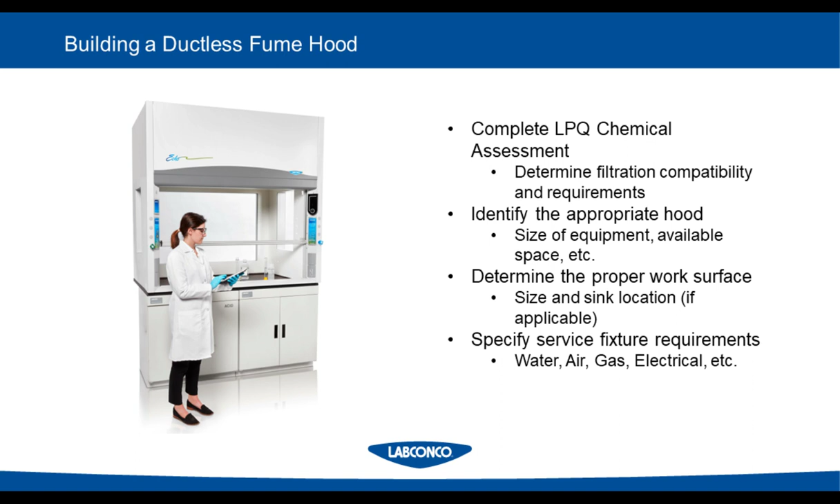Next, all benchtop fume hoods need somewhere to sit, and that's where a work surface would come in place. Something to take into account would be the size and a sink location if you're using water and need to dispose of it. And then finally, specify any service fixture requirements that you have, whether that's water, air, gas, electrical, vacuum, pretty much anything that you need to put in your hood, you need to make sure that you're having that accounted for. So that's what we have for the filtered fume hoods in improving your lab's green initiative.